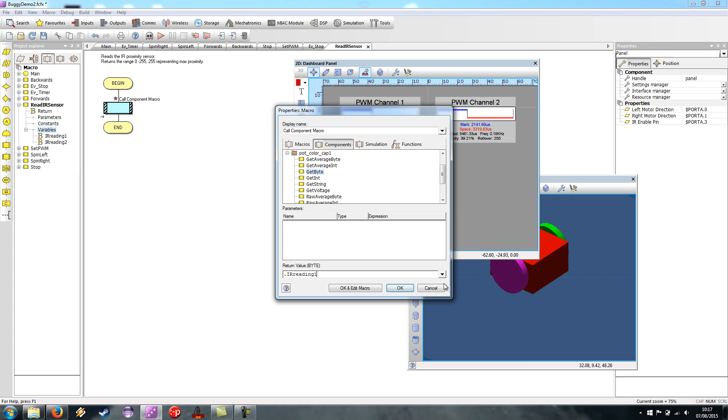I'm then going to switch on the infrared output, and I do that by using a calculation icon to refer to the property that we made, so IR enable. I'm going to assign that the value of 1, so it's going to light the infrared LED. And I'm going to use a very small delay, so maybe 10 microseconds, to allow the infrared sensor to react.

And then I'm going to read the potentiometer again, so get byte, and this time I'm going to store it into IR reading 2. Once I've done that, I'm going to switch the infrared LED back off to save battery power. And I'm then going to add a final calculation to say the return value is equal to IR reading 2

minus IR reading 1. What this does is it takes a reading when the infrared is switched off, and then it switches the infrared on and takes another reading. This second reading, we subtract the first reading from this, and that gives us the infrared light level regardless of what the ambient light level is currently reading. So that's the code to drive the embedded side functionality.

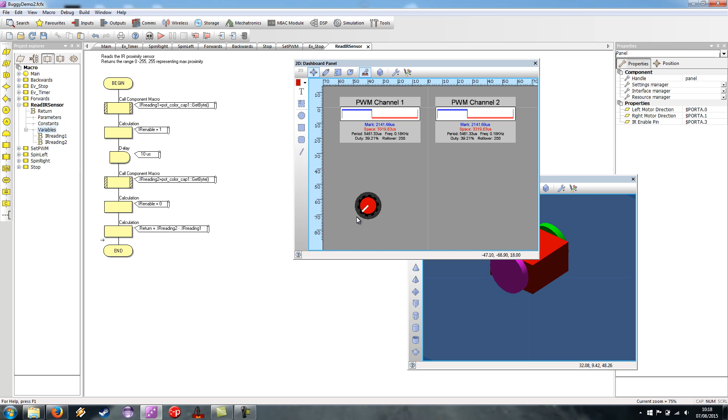To do the simulation side things, what I'm going to do is I'm going to create a second macro. So I'm going to right click this macro and duplicate. I'm going to call this one read IR sensor underscore sim. This is going to do exactly the same thing, but it's going to do the simulation code to actually detect other objects on the

panel. To get this simulation override to work, so when we call this function, this one will be compiled and downloaded to the chip, and this one will be executed when we simulate. To do that I go to the interface manager, and I click on the read IR sensor macro, and I set that to be downloadable.

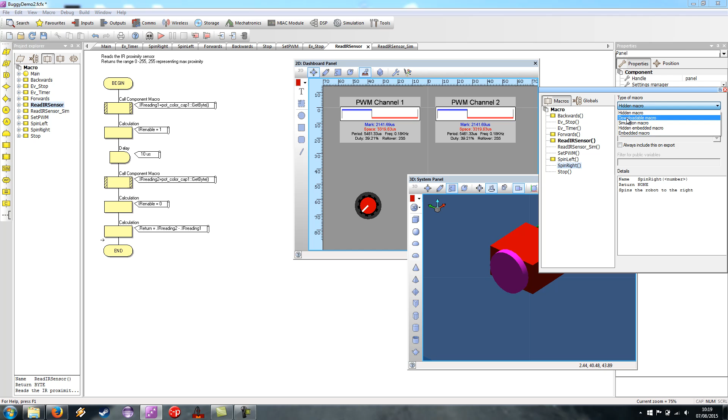And then you see I get a simulation macro, currently it's set to be itself, and so I'm just going to add the underscore sim, and then that allows this macro to be run whenever we're doing simulation and this macro to be downloaded. While I'm in here, I'll set all the other functional macros to be downloadable as well. Set PWM as a hidden macro, so we don't need to expose that one. Okay. Save the project. So now, let's create the simulation side of things.

To do this, I'm going to start with an object. So here I've got another cube, and in the position properties, I'm going to shrink this down a bit. So instead of 32 by 32, let's try 1 by 1 by 1. It's maybe a bit small. Let's try 5 by 5. That's a bit better. And let's change the colour just to make it a bit more obvious which is the sensor. Make it yellow. Oops. Let's set it in the right place. There we go.

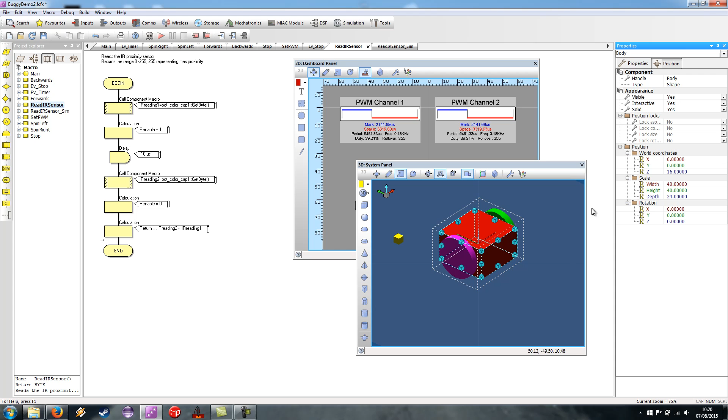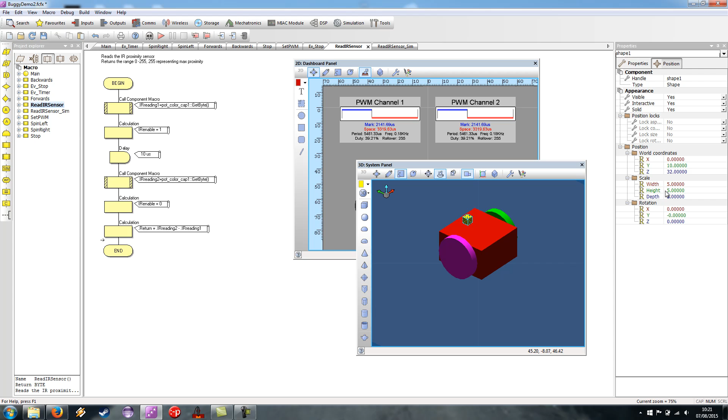Now the cube for the body is currently located at 0, 0, 16. So let's set the position of our sensor cube to be, let's try 0, 10, 32. Let's see how that looks. That's pretty good.

So what we're going to do is we're going to use this to beam forward a line. In fact, let's take it forward a bit further. 10. Let's make it 16. That's a bit better. And that's going to be the front of our robot. Is it hovering a bit? Yes, it is. Let's just bring it down a little bit further. 30.

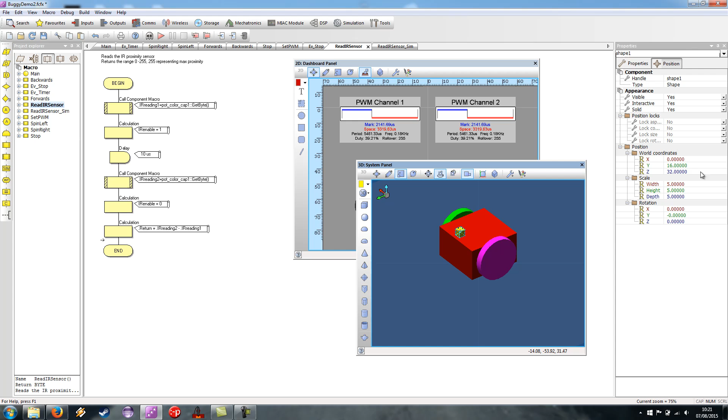That's better. Okay. So I'm going to right click, I'm going to click the object, and then here I'm going to give it a name that we can refer to. So I'm going to call this IR sensor.

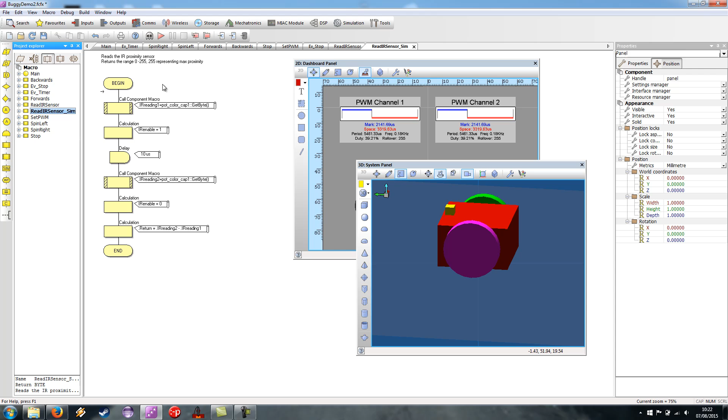So let's go into our read IR sensor sim component macro. Let's delete the code that's in there, and let's create some new variables. We don't need the IR reading 1 and 2 anymore, so let's get rid of those. What we do need is we need a position handle object. And we need a byte to determine when we've touched something. So we'll call this touch.

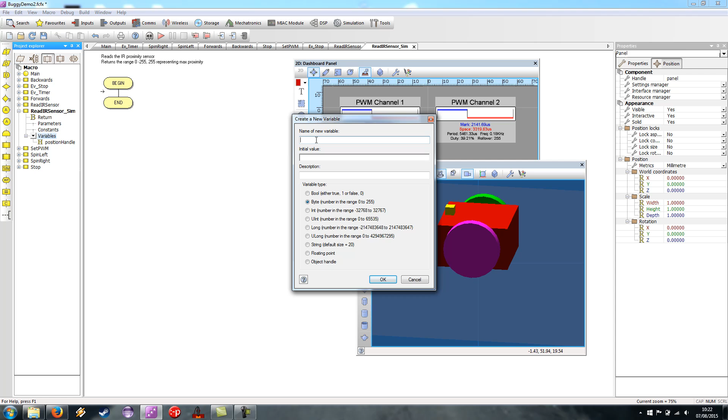So we're going to start by assigning our position handle. We're not going to use a calculation icon for that. We're going to use instead a simulation API macro. So under functions, and it's panel position get. The handle of the object that we want to get is our IR sensor, and we're returning the value into our local position handle variable. So that just takes the position of this cube and assigns it into this object variable.

The next thing we're going to do is under functions, we're going to use panel position move along. The handle is our local position handle. The axis is this. So this refers to our component space, so whenever the component is dragged onto a user's panel, it will always be the direction that that's facing. And then we probably want to move by Y.

What we're trying to do is get the cube, the position from the cube that we've taken, and we want to move it so it's not touching the robot anymore, just so we don't get a false collision when we're doing IR detection. So I'm going to try and move this by 10 in the y-axis. The y-axis is here in green, so red's x, green's y, blue is z.

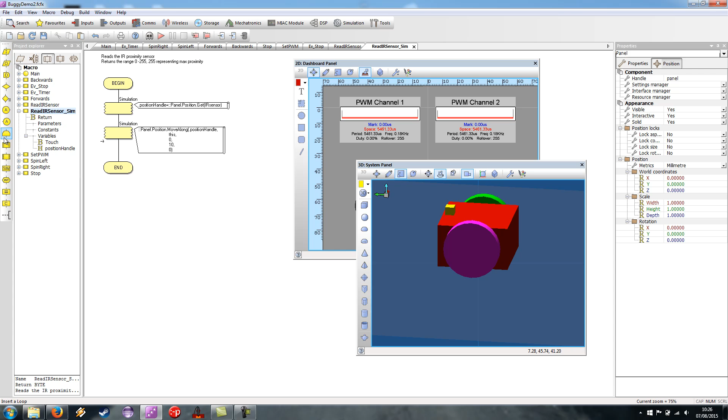Okay. So now we want to create a loop, and we've got a return variable. We're going to assign our return, so dot return equals 255. So we're going to initialize it to be the closest proximity it can. 255 is max proximity. And in our loop, we're going to say while dot return is greater than 0. Inside our loop, we need to decrement the return. Return equals return minus 1. So this will loop around from 255 until return is 0, and then it'll drop outside the loop and return.

Also inside the loop, we want to move along the sensor again. So position handle is our handle. Again, the axis is this. The y this time, let's say we want to move it by 2. So now if I add a breakpoint here and run this, oops, switch on our position objects again. Now I can press play, and every time the sensor will move out by the resolution that we've set. Okay, so that seems to be working fine.

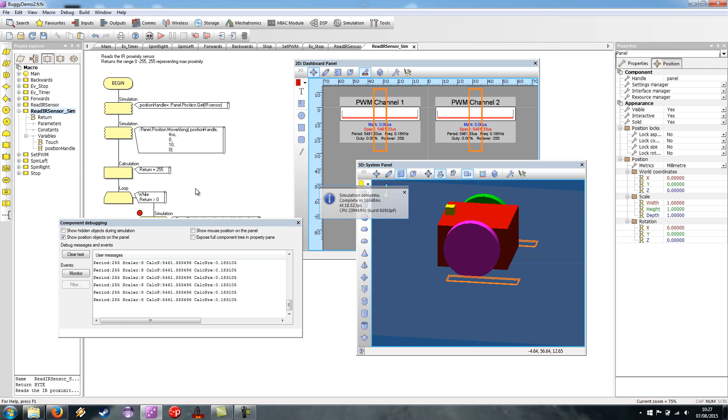The next thing we want to do is detect to see if there's been a collision made. So again, we're going to use the API functions. This time it's Panel Collision GetMultiAxis. The position is our local position handle variable.

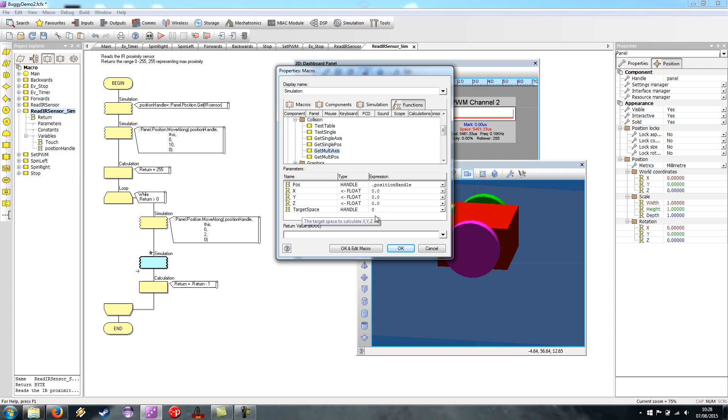The X, Y, and Z, we can assign variables to these, and if there is a collision, these will populate with the values needed to move out of the collision situation. We're not going to use those, so we're just going to assign a float value 0.0. The target space is also 0. This means that it will scan everything on the user's panel once we've exported it to component. And our return value, which we use our local touch variable.

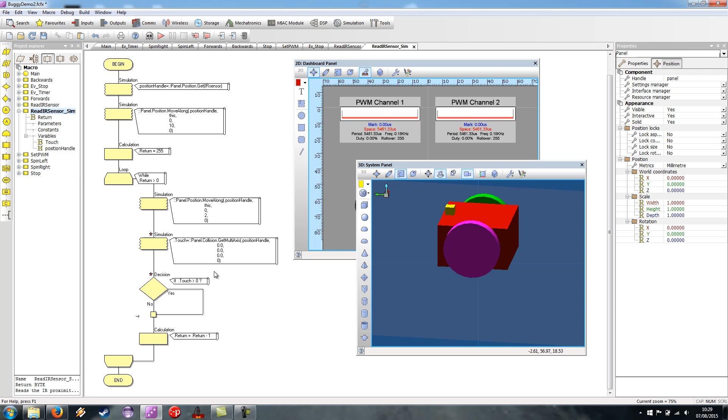Then we just need a quick decision. If .touch is greater than 0, so 0 is nothing's been hit. Greater than 0, something's been hit. And what we do is we create a go-to point and a reference to that to jump outside the loop. So if we hit something, then the return should be greater than 0, otherwise we stay in the loop until the return value is 0 and then we exit on our own.

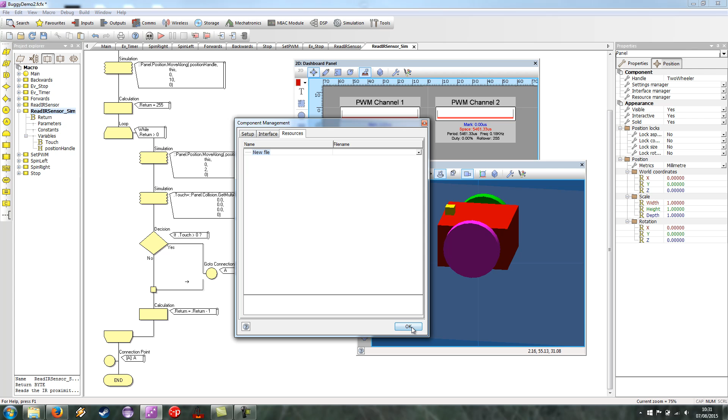Let's just check our interface. So here you can see all the macros that have been exposed. So we can go forwards, backwards, spin left, spin right, stop, and read the IR sensor. More importantly, this one has a simulation override to call this function instead when we simulate it. Resources, we don't have any resources. If we're using mesh files, then we could put our mesh files in here, and then when we export the component, our mesh will be included. I'm just using primitives, so I don't need those. So, save changes, and then it asks me to export my component file. I'm going to pop it on my desktop.

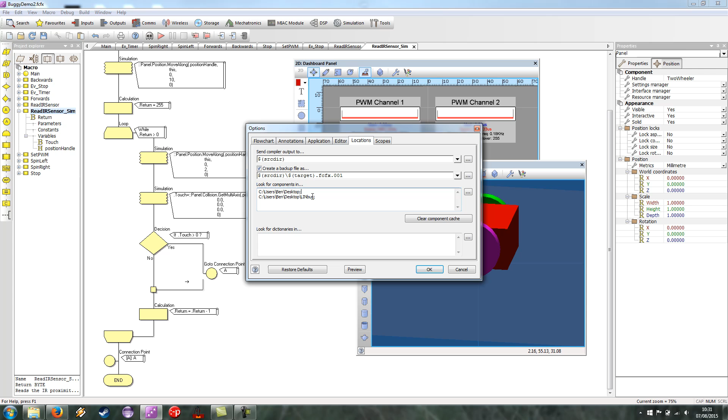In View Global Options, under Locations, you can actually assign folders to look in for components. So you don't have to rely on the program files folder. So now if I go File New, I'm going to create a new project. I'm going to select the target device. That would only matter once you've actually picked a chip to run your robot on. From mechatronics, I'm going to drag on the two-wheeler. So here's our robot component. See, there's our sensor on the front.

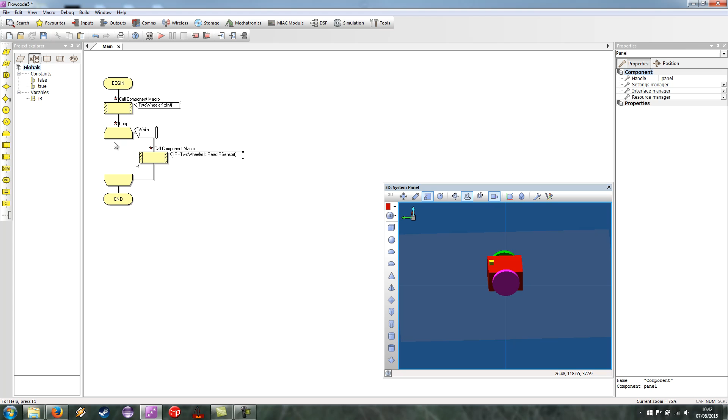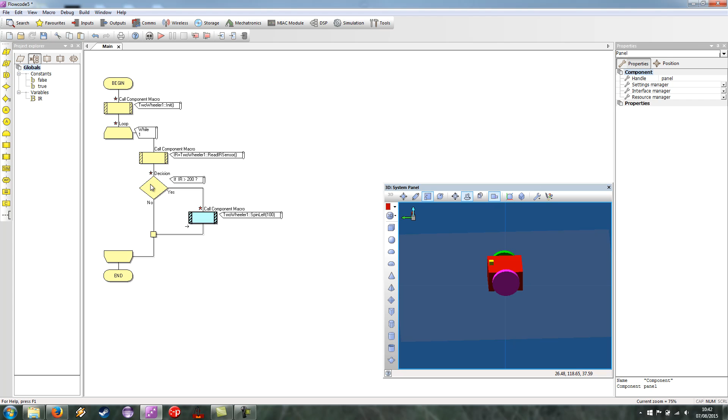And then let's look about creating a simple program. So I'm going to initialize the robot. And I'm going to create a loop. And inside the loop, I'm going to read the infrared sensor and store that value into a byte variable, call it IR. I'm going to say if IR is greater than 200, then we're going to spin, speed 100. If the IR is not greater than 200, then we're going to drive forwards at speed 100. And then I'm just going to add a bit of a delay, so let's have 10 millisecond delay.

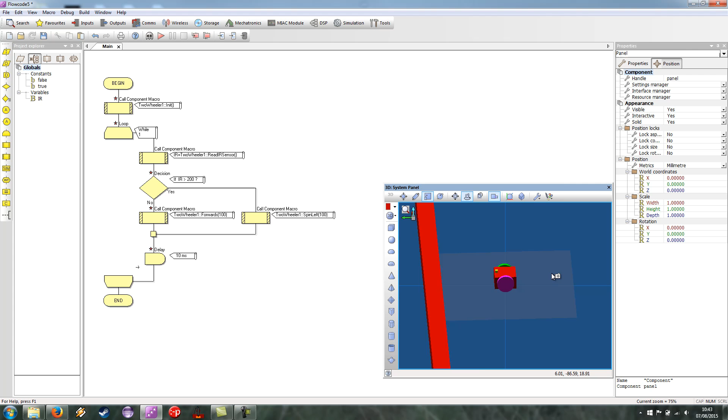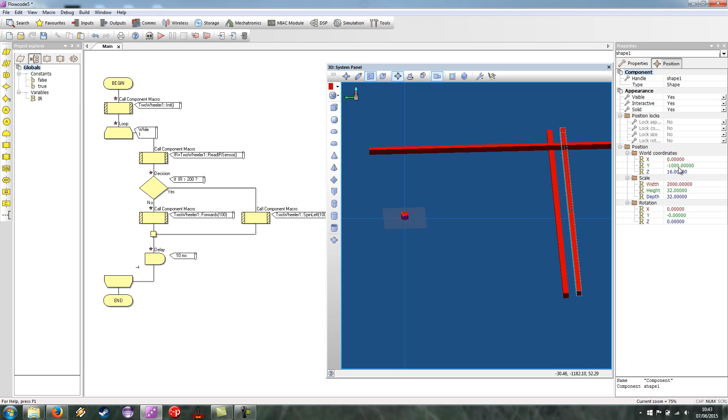And then let's create some walls to go around the robot. So I'm just dragging on the primitive again, and then under position, let's make the width 200. Let's try 2000. Better. Make this bit bigger. So copy paste that, and copy paste again. This time I'll rotate it around the Z axis, so 90 degrees. Let's see, this is minus 1000. Oops, let's put this at plus 1000. Just zoom out a bit. There we go. Perspective makes it look a bit better.

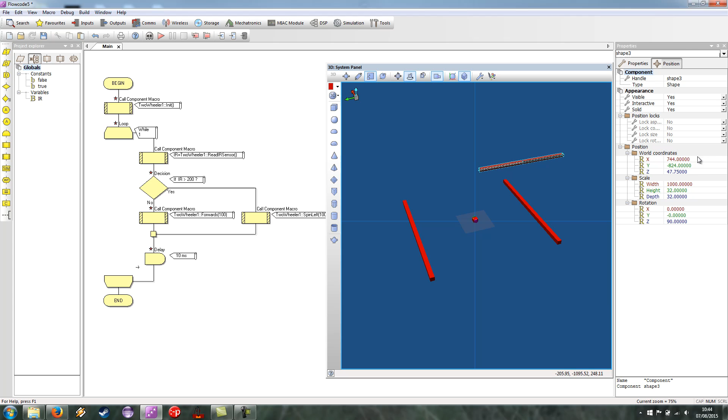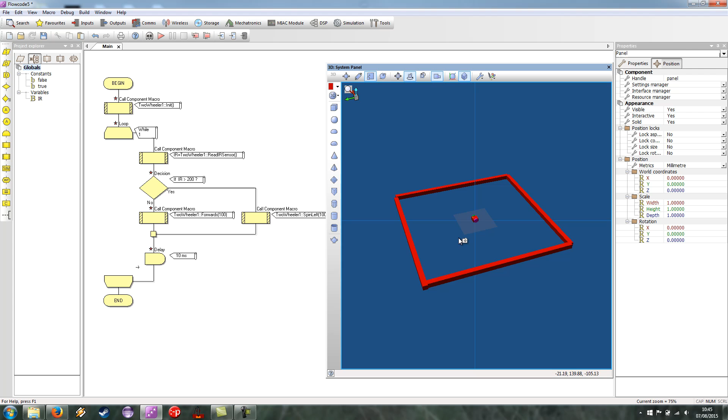Maybe 2,000 is too much. Let's set them again to say 1,000 and then 500, minus 500, 1,000. This one, width is 1,000. 0, 500. Copy paste. This one should be minus 500, 0. Let's get the Z's all the same, so 16 already, and 16. So hopefully we've got a bit of an inside wall now that we can see if our collision detection is going to work. So it's a bit bigger. Save this, give it a name, test, and click play.

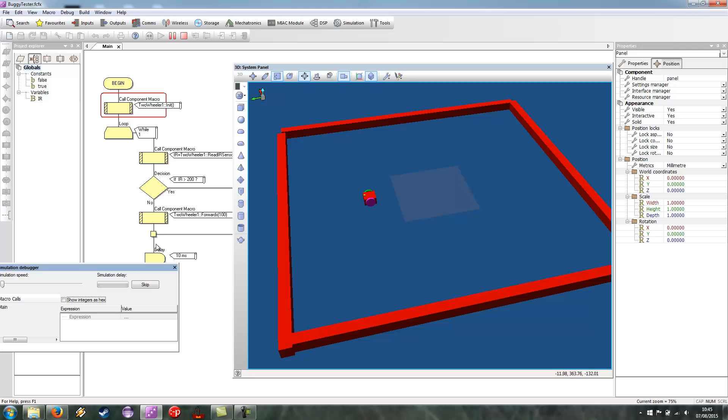You can see that with one sensor, the robot's still having problems maintaining its distance from the wall. So with a robot like this, you'd normally have one at the front, and maybe one at each side, and maybe another one at each corner, and then you can tell as you're turning how far away from the wall you are at all points.